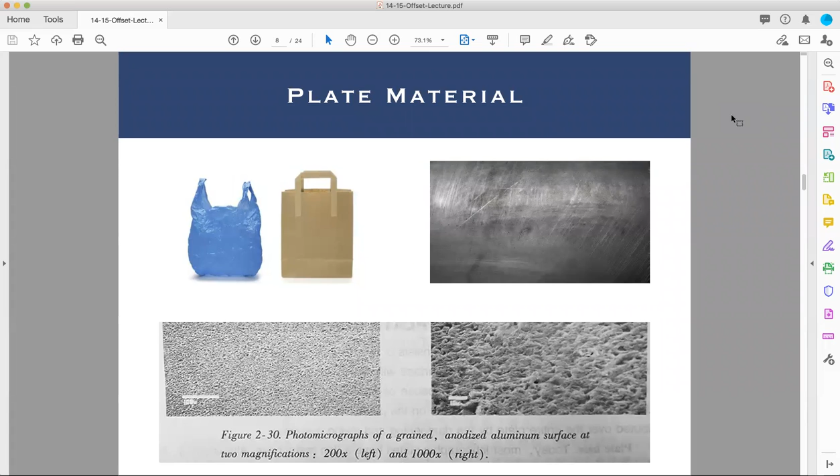Now we're going to talk about plate mounting. In the previous video, plate material, we talked about printing plates and how they're made and what they're made out of. Now we're going to talk about how they get attached to the press. There are different methods of attaching the plate to the plate cylinder. The straight kind has no alterations done. It's simply a rectangle of metal, and there are special clamps that will hold on to the plate itself, just gripping onto the edge through sheer clamping pressure.

Then there's something called pin bar. A lot of the presses at school use this. Pin bar is a bar with lots of little tiny nails on it. And those little tiny nails go through little tiny holes that you have to punch on the edge of your plate. And the edge of your plate kind of looks like spiral notebook paper when you punched it. And those little pins can be kind of sharp, and they bite sometimes when you put them on if you're not careful. So that's pin bar. It's a way of holding it in place that's not just mechanical clamping pressure. It also has physically putting things through the holes to hold it in place like a binder.

Lastly, serrated is a combination of a pin bar and a bumpy cut edge to make sure that it's aligned exactly straight. It's very important that your plates are aligned perfectly straight because the alignment of the plate on the cylinder determines how straight you're going to be printing to that paper that you're feeding through the press. So the plate mounting matters. You can actually sabotage your printing efforts through a poor mounting of your plate.

So modern plates now are mostly done through a photo direct or laser system. Previously, in my father's time in printing, in commercial printing anyways, before he went digital and more into development. Anyways, sorry.

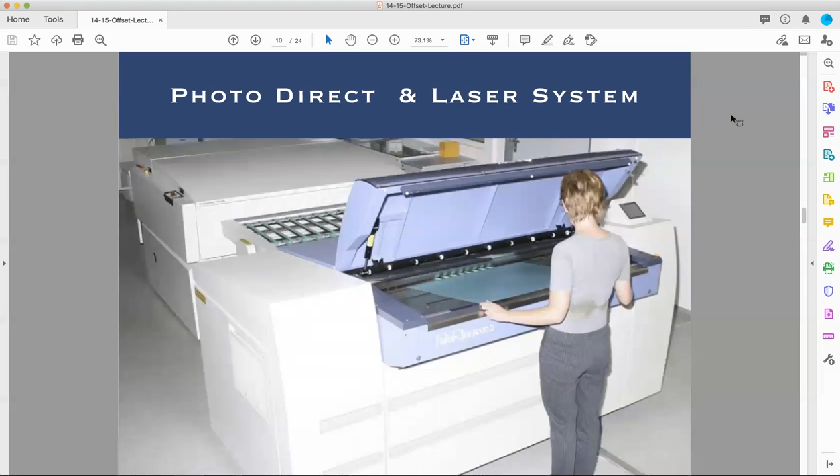In the earlier times, we would use a film method of plate development. The plates themselves may not have changed that much. They're still light sensitive, they have emulsions, and they're either positive or negative acting. One of them will automatically like water until you remove part of it. Other ones will automatically reject water until you remove parts of it.

Photo direct and laser means instead of making film like they used to do, you have a laser system that will actually expose the plate pinpoint by pinpoint with a small laser beam in the correct wavelength of light. Otherwise, you use film like in the old days where you actually make large film negatives and you expose them on exposure tables, very similar to how you make a screen printing screen through the film, and the light goes through it. That involved large cameras and lots of film developing. That's not very commonly used anymore.

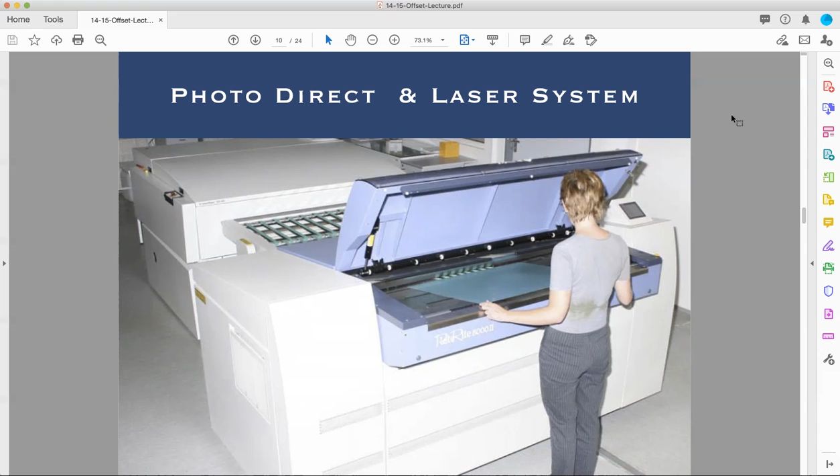If it's a positive acting plate, that means that if you don't do anything to the plate, if you take it straight out of the box, don't develop it, don't expose it, you put it on the press, positive acting will print the whole page dark, solid colored with whatever color ink. I was going to call it black, but that's only if you put black ink in it. That will print the whole page. Negative acting means if you don't do anything to the plate and take it out of the box and you put it straight on the press without exposing or developing it, well then it's not going to print anything at all because it will only absorb water.

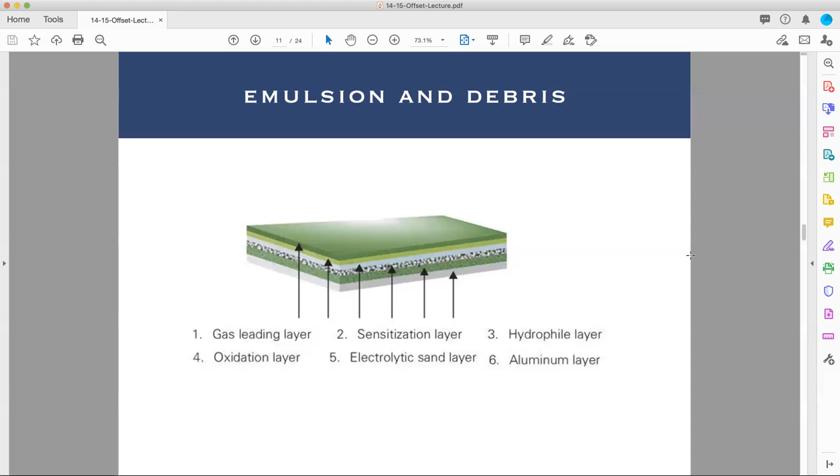So positive acting likes ink until you remove the parts you don't want. Negative acting likes water until you remove the parts that you do want to print. That's the difference. I may have gotten ahead of myself there a little bit.

So computer to plate plates, as opposed to just film exposure plates, these are the ones which are exposed by laser on a plate developer, or a plate exposure, or a plate maker, a computer to plate CTP system. There's lots of names for it. These are the ones we use on campus.

You make your design on the computer, you send it to an output system that goes through a raster image processor, a RIP, and the RIP converts all the information you created on your computer into dot information. It's still made out of dots. They're just very, very, very tiny dots. A decent plate maker will make your plates at 2,400 dots per inch. That's a decent plate maker. A really good one will do in the 9,000 range, and crummier ones will do less.

Digital printing is limited to about 1,200 dots per inch for the maximum resolution it can handle. But anyways, 2,400 is pretty good. And the dots are so small, you probably won't even notice them. And these dots aren't even the halftone dots you normally print with. No, these are the dots that you can use to make the halftone dots that let you vary the size of the dots you're going to print, which lets you vary the amounts of ink you print. So computer to plate, good stuff.

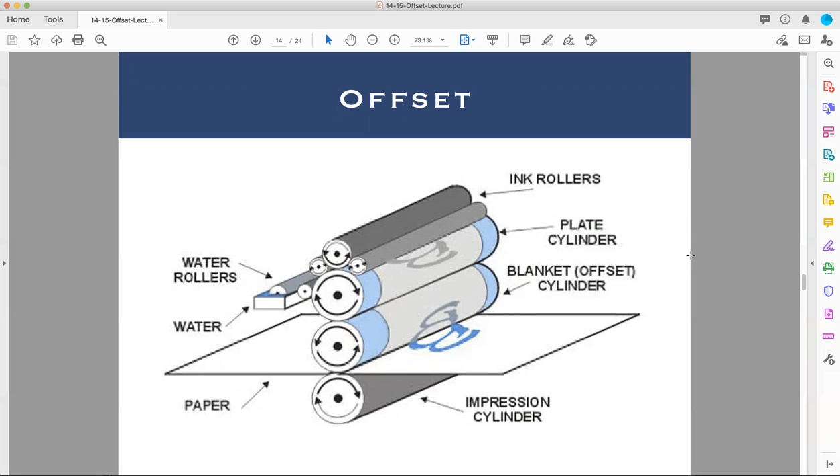So we're back to talking about the offset press systems. So again, each unit in an offset press prints one color of ink. A full-on printing press or press system will often have multiple, although it's possible to have just one. In the old days, 1 and 2 were common and popular for small presses. Now it's mostly going to be 4 units up because people want full color imagery.

So these 4 units, each one prints one of the primaries of cyan, magenta, yellow, and black of printing full color printed images. Each one of these has its own ink system, its own dampening system, its own plate cylinder, its own blanket, and its own impression. Because you need all of those to print any one color of ink. So each color requires all that equipment to print that one color.

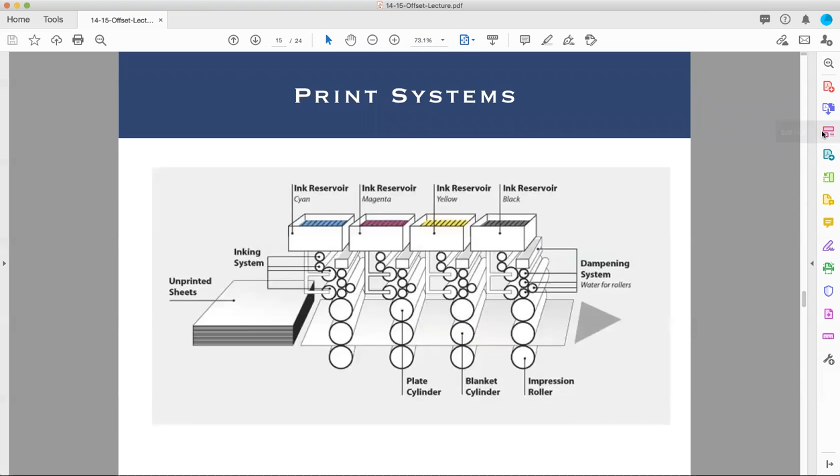Feeding systems. There's 2 types of feeding systems. There's web presses and there are sheet fed presses. The web press prints from a web, and a web is a giant roll of paper. It's hard for me not to think toilet paper when I see it, and that's really rude because toilet paper is only one kind of paper. And it's kind of stereotyping to say that. There are so many types of paper available.

Web presses print on a giant roll. Sheet fed picks up already cut out sheets. Like if you buy paper at Target or Walmart and it comes in a little ream of paper and you pull out individual already made sheets, a sheet fed press would print that. A web press would not. A web press requires a roll.

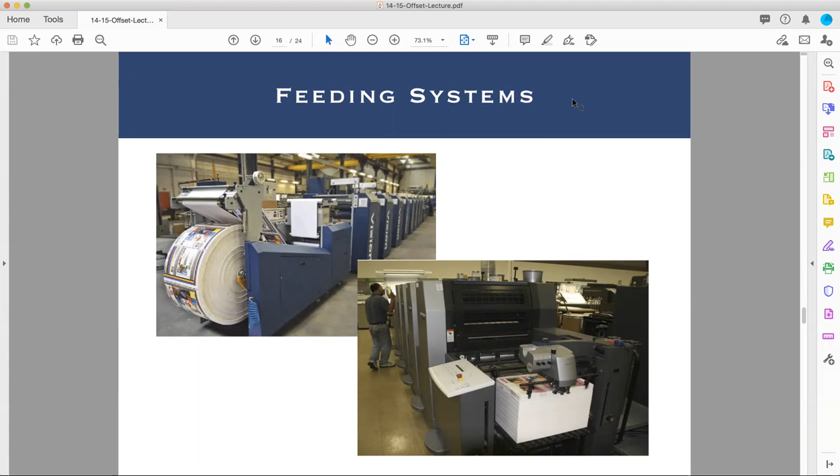By the way, if I ever start a band, I'm going to call it Sucker Foot. It's a great name for a band.

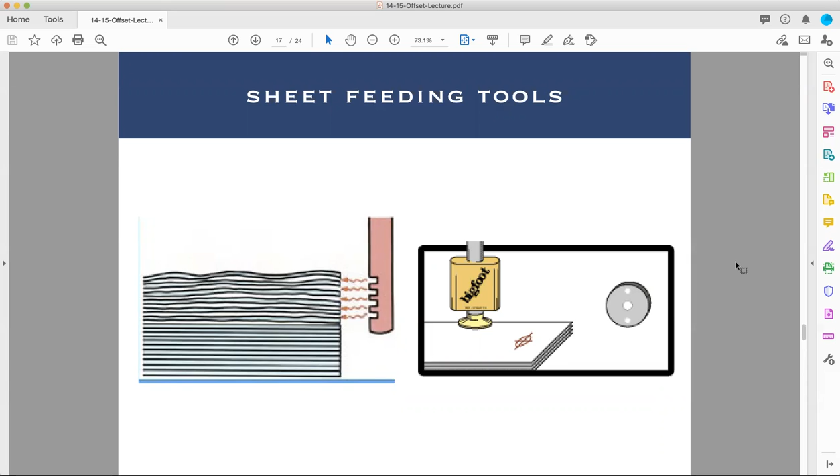There's also double sheet detectors. The presses are set up, built, calibrated, and maintained to allow 1 sheet of paper through at a time. If you print 2 at a time, not only do you have a blank sheet that didn't get printed between there, but it also throws off the balance of everything.

The exact impression, the distance between the cylinders that allows that paper, controls the amount of pressure that's being put on them. And if you run multiples through, you can cause it to jam, you can cause it to throw out of calibration, you can cause all sorts of problems. So a double sheet detector is there to make sure that only 1 sheet goes through at a time.

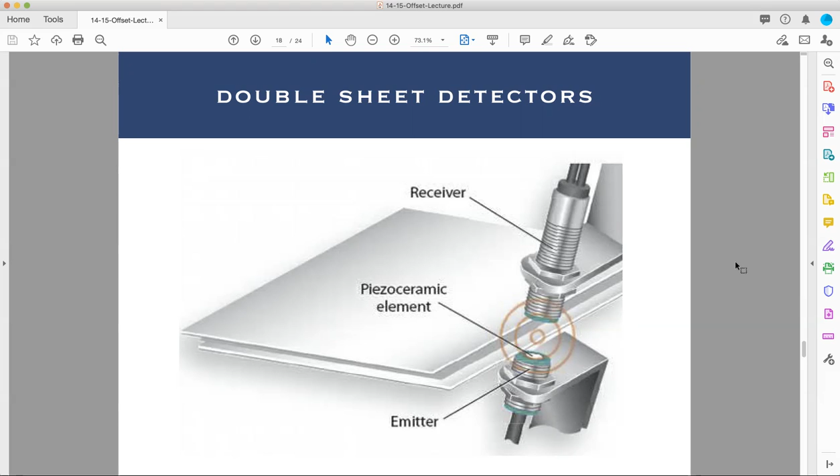On digital presses, you often have something called a retarder roller, which is a wheel spinning the wrong direction underneath to make sure the bottom sheets don't go through, just the top sheets.

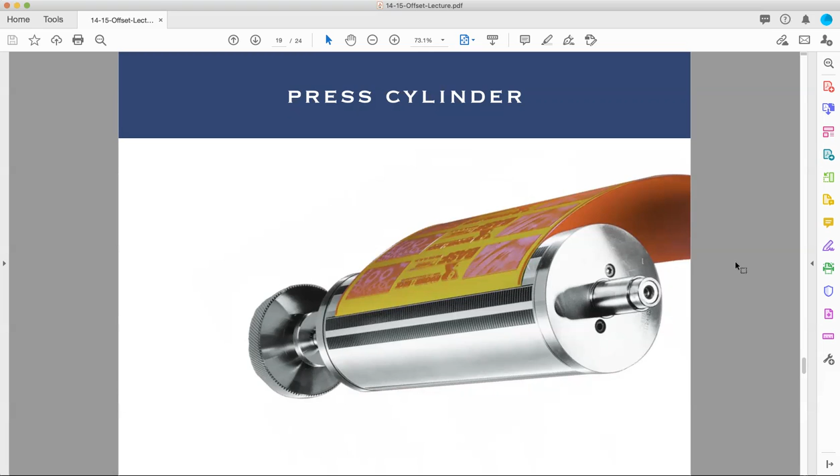Here's a press cylinder. This is a plate cylinder. The plate wraps around the cylinder. This one uses a weird magnetic system to attach the plate. I've never used anything this fancy or advanced. Mostly I just use pin bar systems. But you can see that around it wraps the plate, and that's the important part of this.

Let's talk blanket cylinders now. So the blanket cylinder is what makes an offset press offset. In fact, some places will even call it the offset cylinder because it's what keeps the paper from touching the image. So the blanket cylinder requires a certain amount of pressure. A certain amount of pressure also means a certain amount of depth of how far the press cylinder or the plate cylinder pushes into the blanket and flattens it out while it's transferring the image over.

In order to get the right amount of distance, you have to make sure there's packing behind the blankets. The blankets have to have sheets of something behind them to make sure they're the correct depth, and the depth and the distance they are from the plate cylinder, or how far they squish together, affects how much pressure is going on, affects how the image transfers. There's two ways of measuring that. You can either do the math.

Everybody likes pi. In fact, I'm recording this on Pi Day, March 14th.

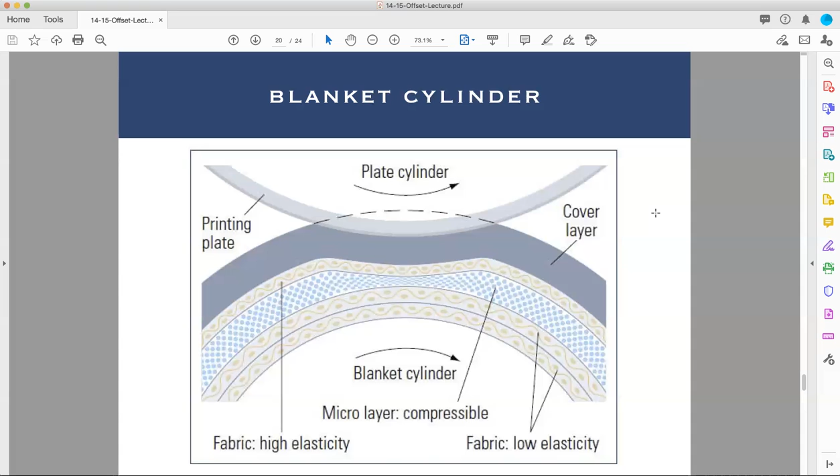If you do the math, you can actually compare the distance. If you measure the outer diameter of the blanket and measure the inner diameter of the cylinder, you can figure out how much packing is necessary to make sure that it's going to be the right depth. Also, you can use something called a cylinder packing gauge, which is a tool that measures it like a caliper and will tell you the answer. I am a believer in using machines to do our math for us when possible, just because it's nice to make something easier and be able to spend your brain on more fun things.

Let's talk dampening. Unless you're using a waterless, no guffawing, stop laughing. I know I said waterless. Unless you're using a waterless press, your press has a dampening system on it. And that's going to be how it gets the water or the fountain solution onto the plate cylinder to make sure the ink doesn't go where it's not welcome.

This kind of goes and stops, goes and stops. Depending on how frequent and how long it spends on the rollers that go to the cylinder is how much water it gives. So it's a way of metering the water quantity through the frequency of the Ductor moving back and forth.

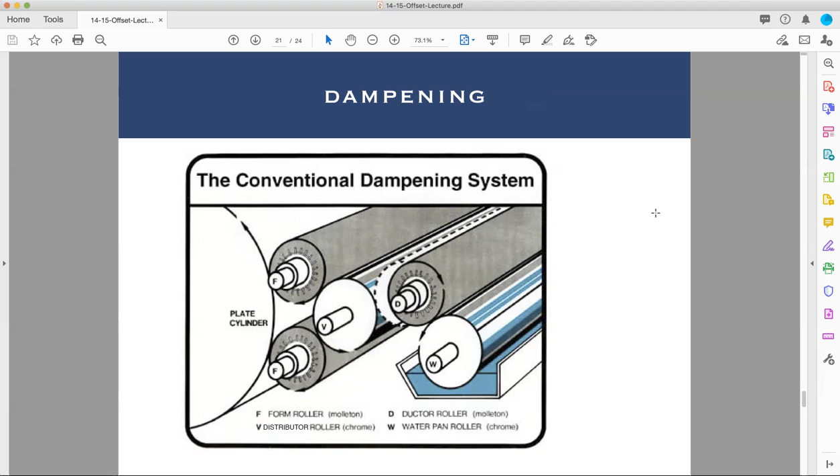Fountain solution is full of water, gum arabic, and acid. Mostly water. It needs to be a pH neutral, non-mineral water. So distilled water or water run through a reverse osmosis filtration system will work. Fountain solution also comes in a concentrate.

Like if any of you grew up in the 80s and you went to any big family, school, public, or religious events, and they have like punch in the big igloo coolers. You guys remember that red punch that came from like Smart and Final? Ooh, good stuff. That stuff was sweet red nectar.

Anyways, that stuff was made with concentrate. You buy a big jug, but the jug contained enough to make 3 or 4 coolers full of punch. So you'd pour some in and add water, and you dilute it to make your drink. Same thing here. You add water to it. Actually, the other way around. You add it to water, because when you're mixing chemicals, you always add the acid or the chemical to the water, not the other way around. That way, if you splash, you're splashing water, not concentrated acid.

The pH, the acidity of fountain solution, in case you're worried about touching it if you ever need to, although you don't want to get a lot of chemicals on you, it's not like acid that's going to burn your skin off or melt your clothes or burn a hole in the floor. Maybe in its concentrated form, but once you have the fountain solution made, it's actually somewhere between coffee and root beer as to how acidic it actually is in practice.

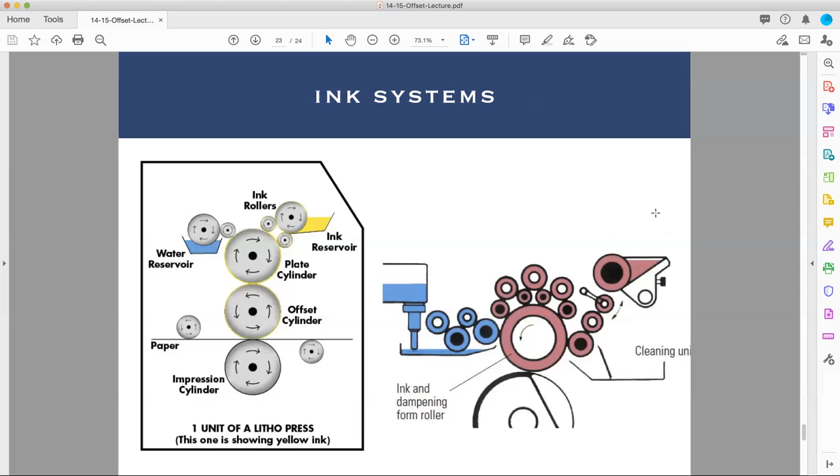It's also possible, I don't have a picture of it right here, that you can have a combined ink water system. What? Combined ink water? I know. Weird, right? But it works because water and ink don't mix, right? Water and oil don't like each other. So if you put the ink on the roller first and then you add the water later in the sequence, the same roller can have a layer of water on the outside and a layer of ink on the inside. And when it pushes it against the plate cylinder, the water dampens first, and then, once the water's been absorbed onto the plate, the ink is free to go onto the plate afterwards. It's a really incredible, fascinating system. I'm quite delighted that they thought of that.

Delivery systems is what happens to your paper afterwards. In some senses, you'll end up with a pile of sheet-fed paper piled up onto a delivery pile. The gripper that grabbed the paper to take it through the press will take it out and drop it off onto a stack, and the stack will lower, lower, lower. If you're talking web fed, it can either be cut into sheets and stacked, or the web can simply be spooled up on another giant roll for transport on the other side.